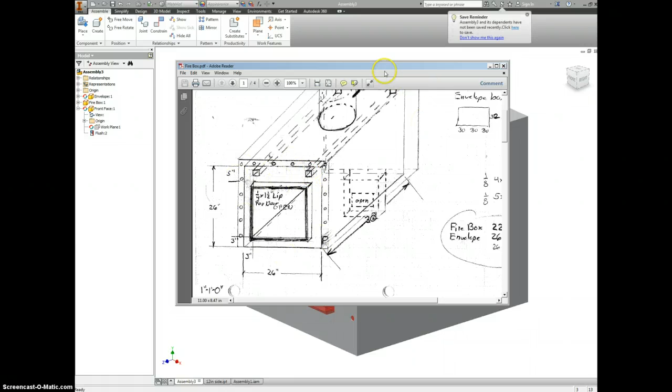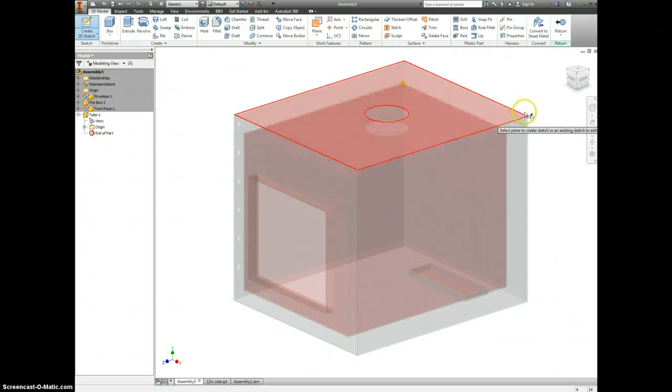Okay, so again, we're going to make a new part, and I'm just going to call it tube. And it's going into our firebox folder, so that's good. I have to pick out a reference. So I'm going to pick the firebox as our reference. I'm going to look at the front view and make a 2D sketch. Let's try this again. 2D sketch on the inside back of that. Let's just go to our home view and make sure we're looking at the right thing. Yeah, it looks like it. Okay.

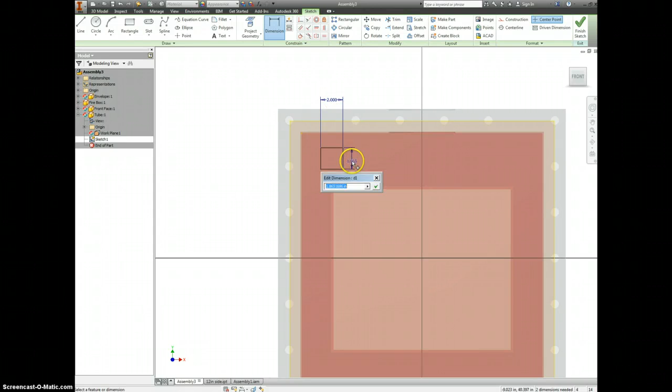So these tubes are going to be somewhere in here. And let's see if I can find my drawing of it. It's a little bit confusing. They're going to be 2 inches by 2 inches, so they're square. They are spaced out 2 1/4 from the edge, so we have to project the geometry here. Actually, it's not even going to be with that edge, it's going to be with this one. Let's make a vertical constraint with this corner and this line.

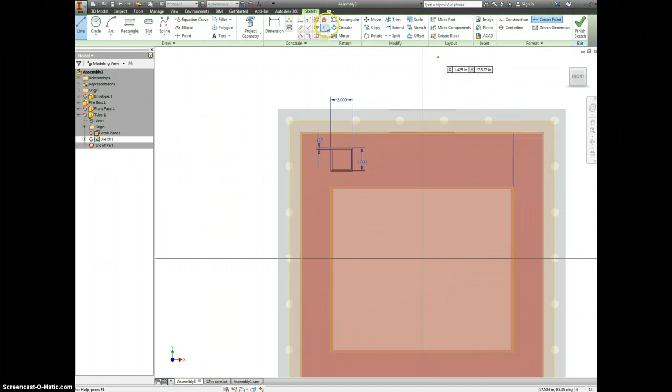Okay, they are an 1/8 inch thick, so let's offset this. This is square tubing, 0.125. Alright, and then I want to kind of split the difference between here. So let's kind of cheat to do that. I'll draw a line, use that as an endpoint, go straight up, and then I'll use a horizontal constraint to find the midpoint of this new line and the midpoint of this square. And I'll turn that into a construction line so the computer doesn't get confused. Alright, now I should be able to extrude this.

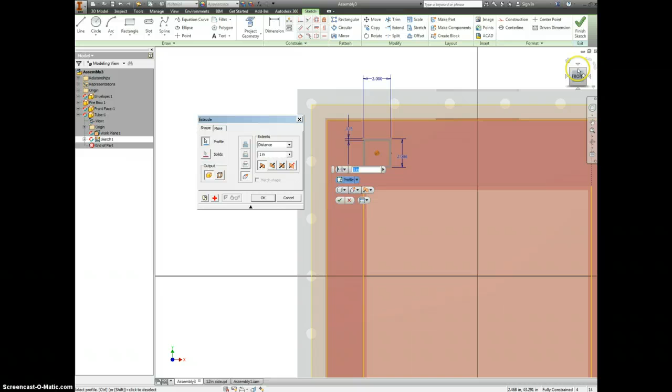And the distance to extrude is a little tricky too, because I want to go through the firebox and through the envelope and through the front face. So let's say distance is going to be to the front face of this. When you click To, you can click a surface and it will go up to that point. Alright, so it's not actually going through this yet. It's going all the way up to this. That's pretty good too.

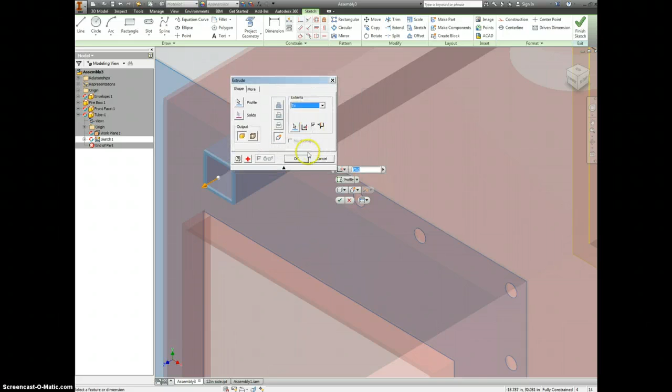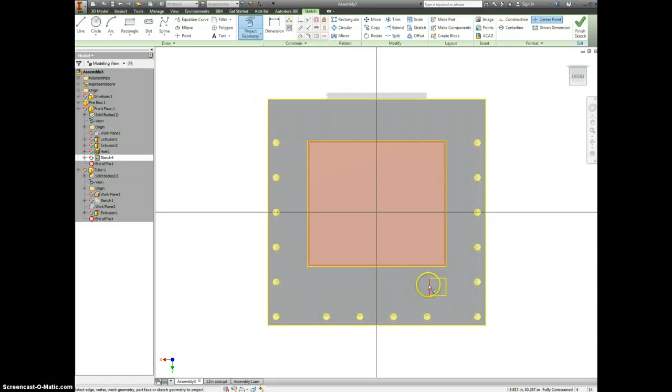Click OK. We are going to make another one of these, but we don't have to create the file for it to make a second one. So instead we're just going to click return, and we do have to modify a few things. Let's go and do it now. So double click on your front face, right click, make a new sketch. I saw it snuck over here somewhere. Alright, let's finish our sketch and extrude, and we'll make a 1/4 inch cutout so that that tube has somewhere to go. Select return, and you'll see it's lined up perfectly with what we just cut out.

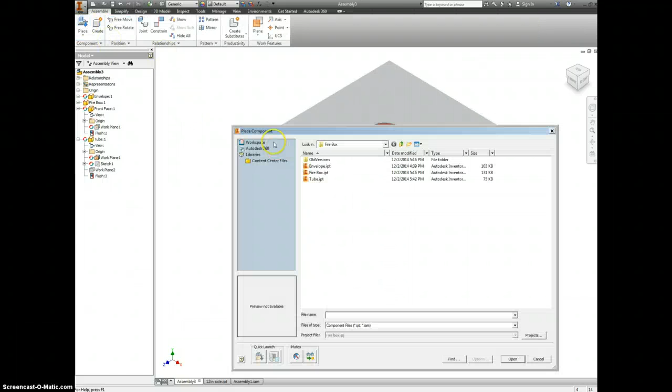Excellent. Now we can place, and you would think it'd be in here, but sometimes you have to open the tube back up again. So let's double click on this. We'll say save one more time, and then we go back to return and place. Now it should be in here. Don't know why it does that. I think it's a bug in the system, but that's okay. Alright, so we'll place another tube in. So I don't want to make the 2 tubes as the same part file. That wouldn't work as well. And turn the visibility off of the plane. Maybe not. Work plane, right click, uncheck visibility.

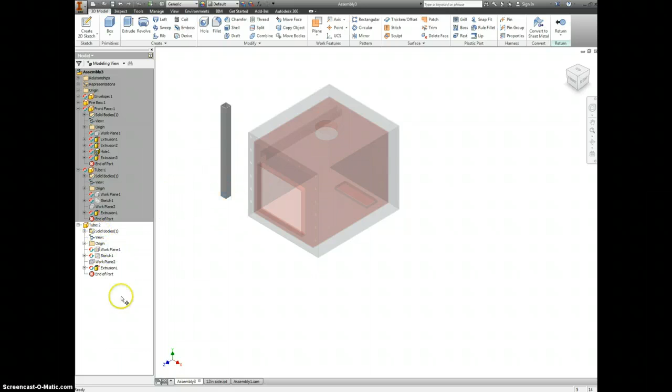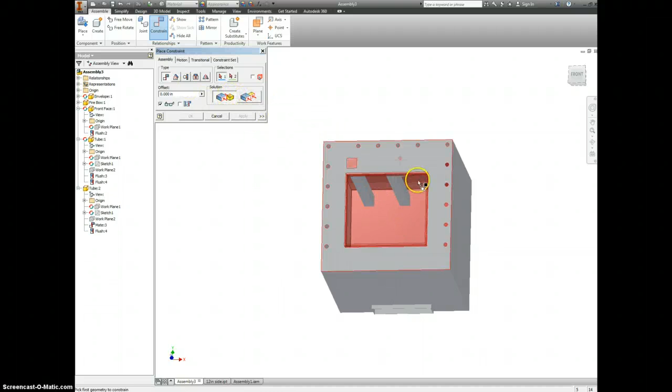And now we can start to constrain things. I want this to be stuck against the back of that. Apply. If I look under a little bit, I can say that the bottoms of these should be flush. And if I switch to a mate constraint, this is going to be mated to... Actually, it should be flush, I think. It's going to be flush with this plane. Alright, so that should be in the exact same place as this.

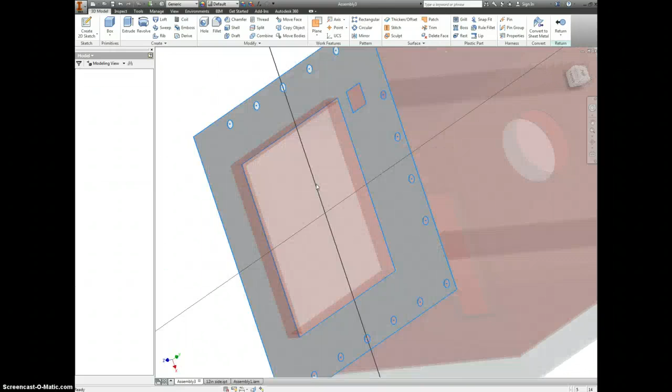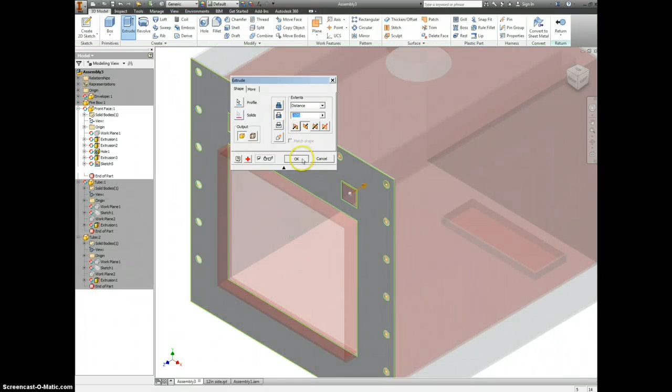Double click on this front face again, and let's right click, make a new sketch, and project the geometry one more time. Make sure you get the outside of the tube and not the inside. Finish your sketch and extrude. We are removing material. Alright, and that should be perfectly lined up with the edges of these and with the tube on the inside.

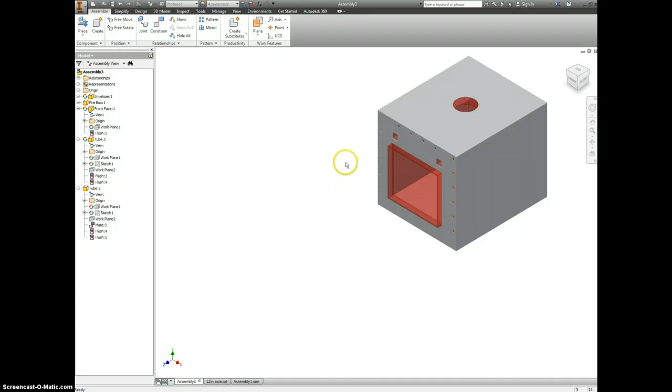If we choose to modify the tube to have it stick out a little bit, we can do that, and because we put the mate constraint at the back of this box, this is going to force it to be longer this way, which is what we want. Okay, so now we have the tubes in place. Really have everything but the legs. So I'm going to call this a video. It'd be a good stopping point for a lot of you, and we'll make the legs in the next one.